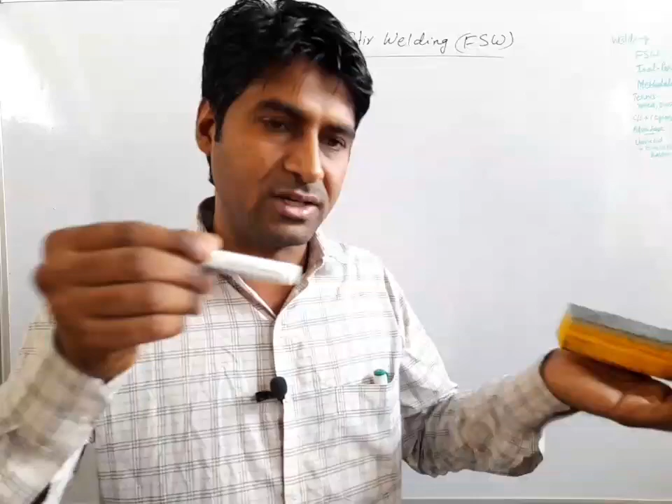So today I will discuss about this friction stir welding, but first of all I will tell you about the background of this welding technique. So when we listen about this welding, some pictures come in our mind, like the roadside welding where one electrode is used and a flame is generating and melting is occurring and some pollution is there, like this.

But friction stir welding is a different kind of welding. This is not a fusion kind of welding. This is a solid state joining technique. Solid state meaning there is no melting occurs and no pollution is there, no fume is there. So this is a kind of green technology, we can say.

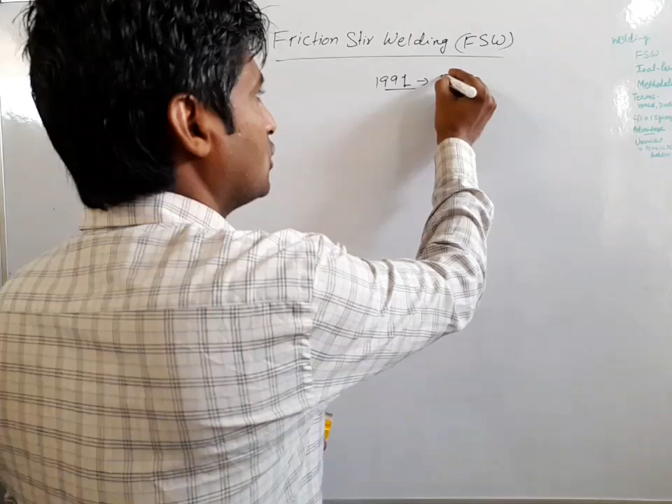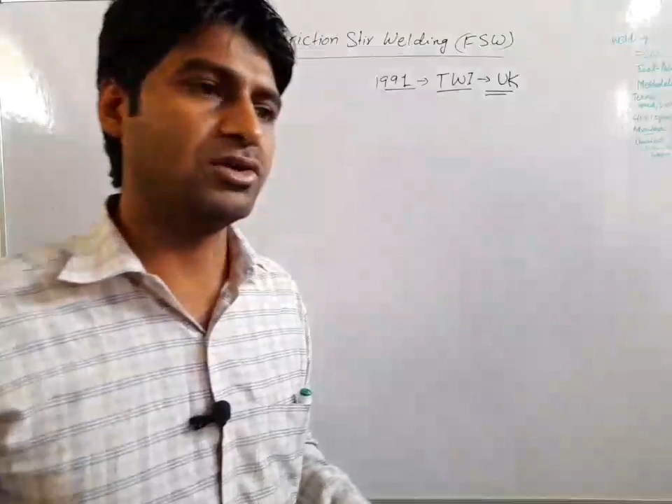And this is not a much old technique. This was invented in 1991, that is about 30 years before, and this was invented at the Welding Institute, TWI, in UK. So this became very popular, especially for aluminum alloys or low melting point alloys like magnesium alloy.

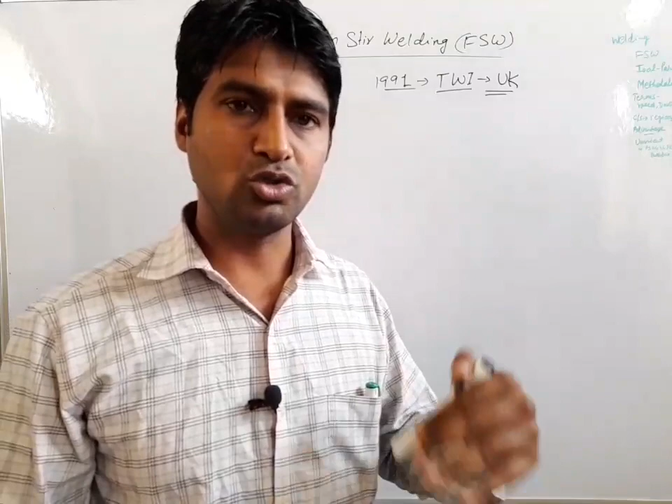And if there is no melting, then how is it possible to join the material? So this is due to the plastic deformation and frictional heating.

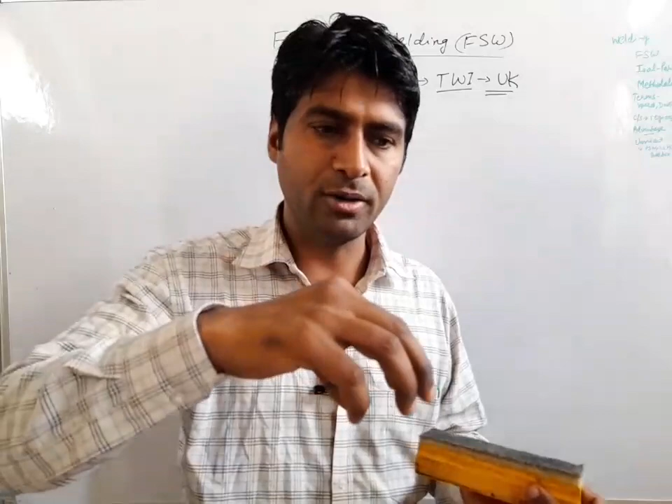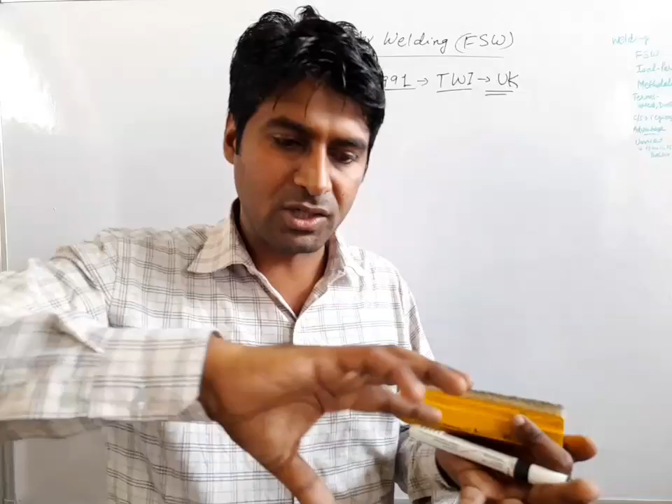What is plastic deformation? As we know, we use a stirring machine in milk to produce butter. So that kind of stirring is occurring here also, because the pin of the tool is inserted into the base material or the interface of the two plates where we want to join the material, and it will stir. So the back side material will go front side and front side material will go back side. Material is stirring around the pin, and due to this kind of plastic deformation, this welding takes place.

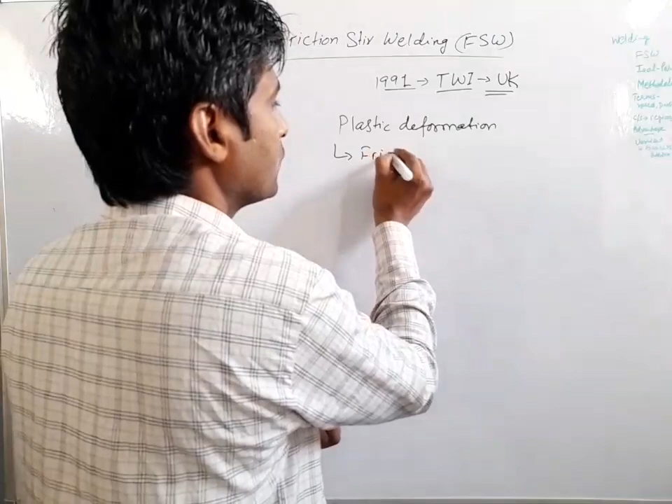So I have used the word plastic deformation along with the frictional heating, that is the heating produced due to the friction between the shoulder of the tool and the base material surface.

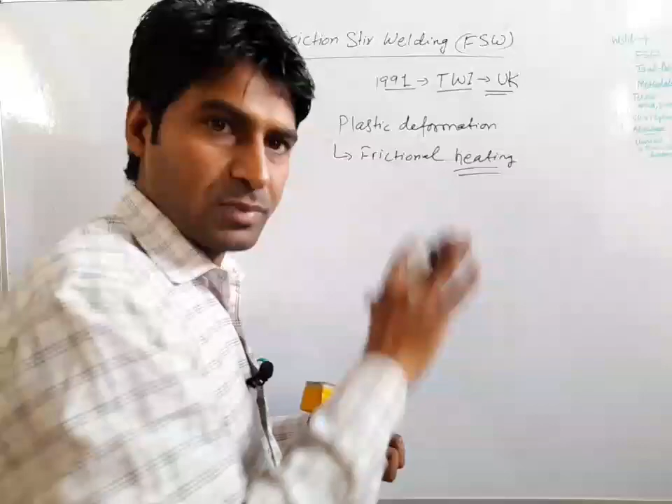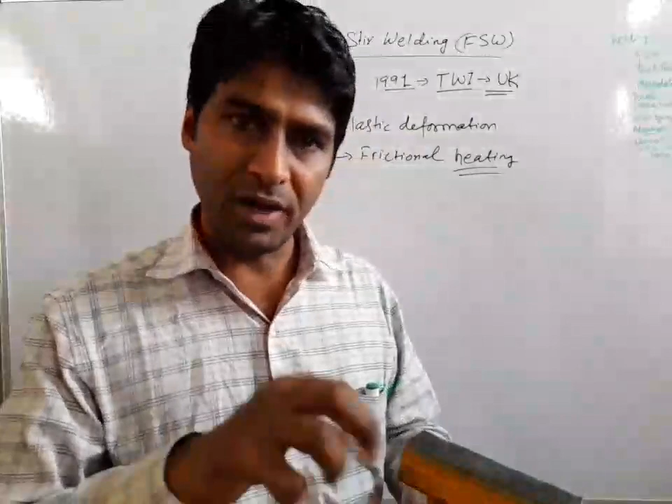Okay, so this is about the friction stir welding, and now I will show you. I have the actual friction stir welding tool and weld joint. I will demonstrate that, or I will show you.

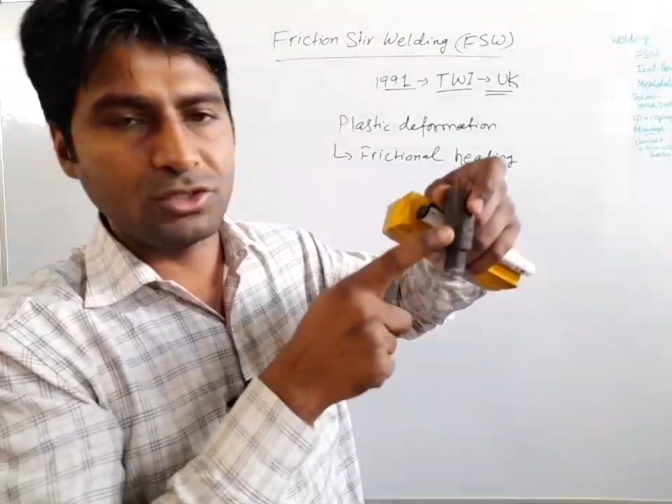This, first of all, is the friction stir welding tool. The upper part is called the tool shank. The second part is called the shoulder. And the third part is the pin or probe.

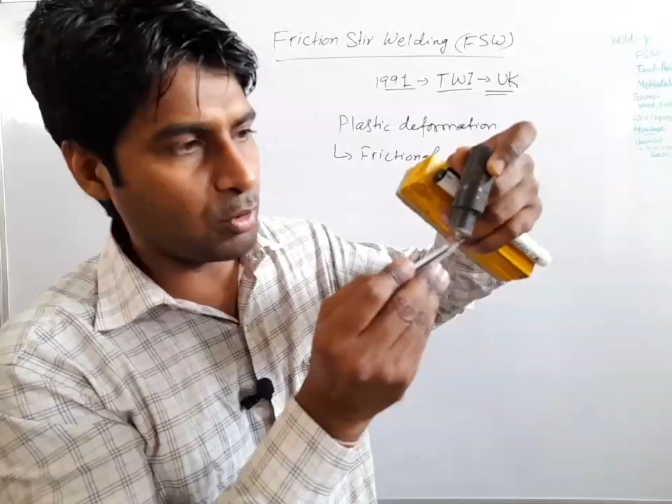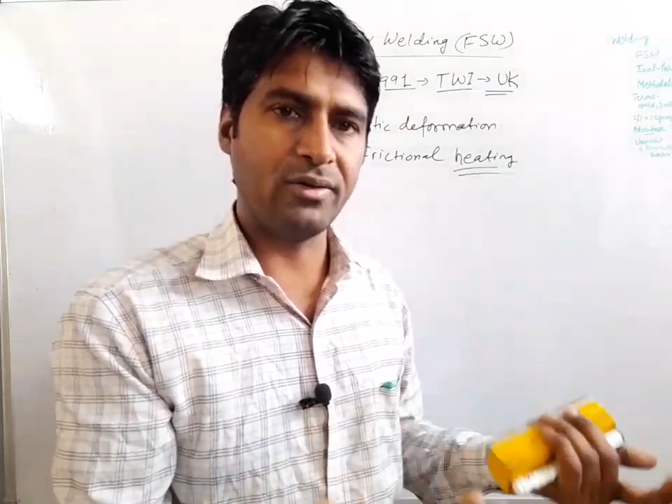So first of all, we will clamp this tool into the friction stir welding machine or a vertical milling machine, which we can use for this welding. We will clamp this shank part into that machine and rotate at high speed, like 300 rpm, 500, 1000, or 1500. And then, like methodology, how this welding takes place.

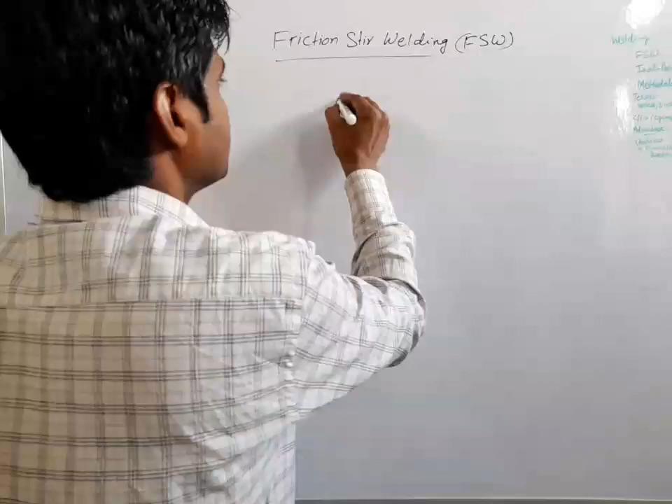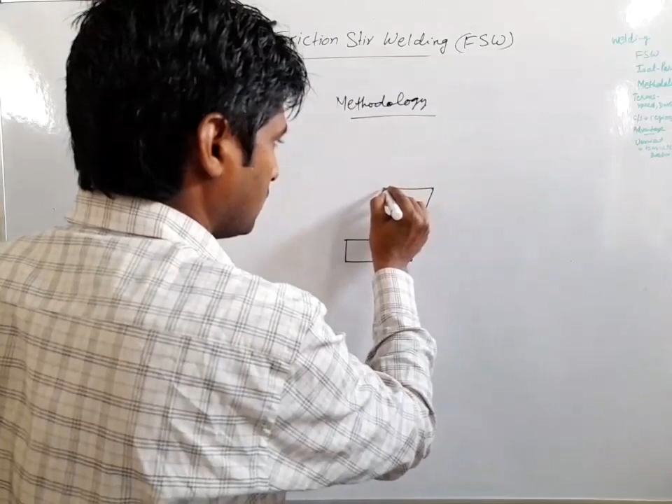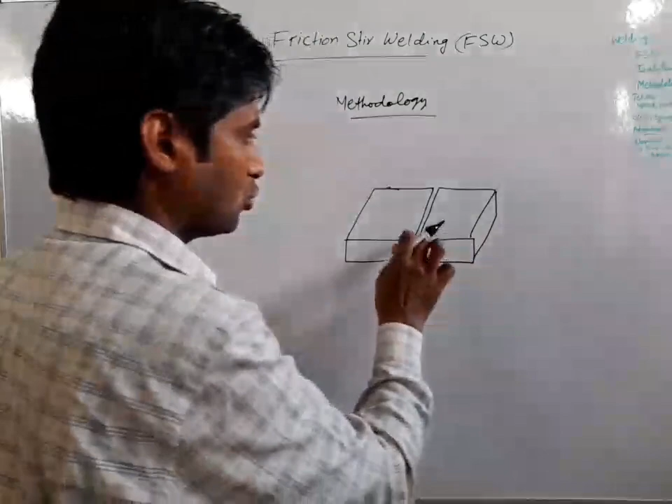Methodology: suppose we have this, one plate, and we want to join this plate with another plate, and we will clamp them. I am just showing this gap, but there should not be any gap between these two plates. These plates will be firmly clamped with each other.

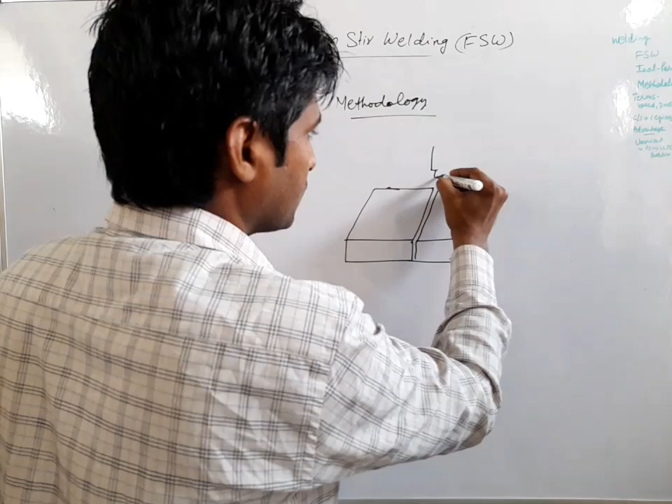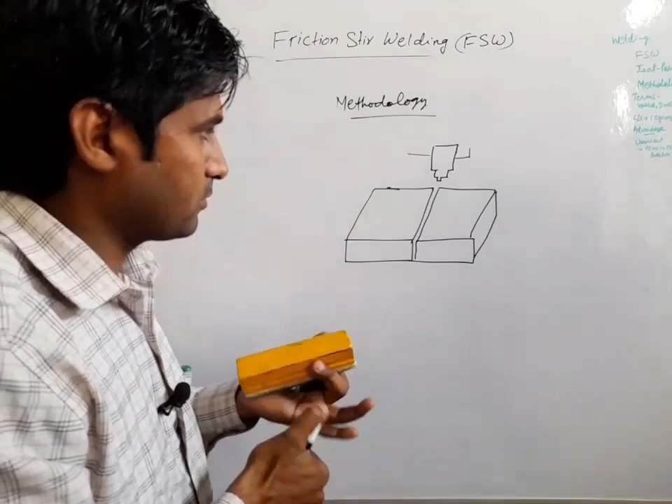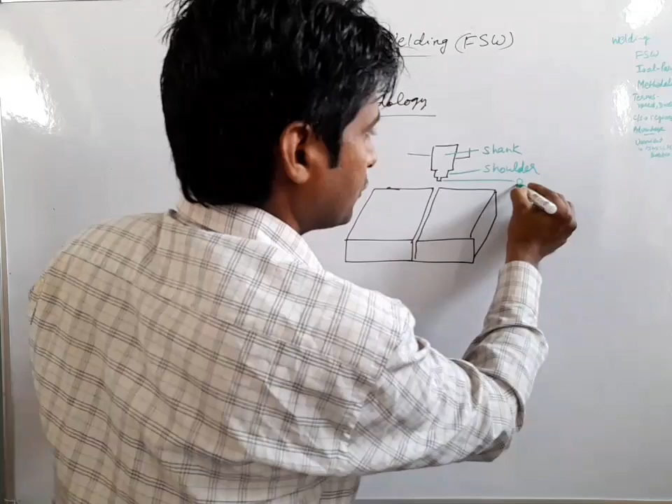Okay, and a tool is used here like this. This is the FSW tool. This is clamped in a machine, this is the tool. This tool is in rotating position. And what are the different parts of this tool? This is shank, this is shoulder, and this is pin, tool pin. So these are three major parts of this tool, and this tool is in rotating position.

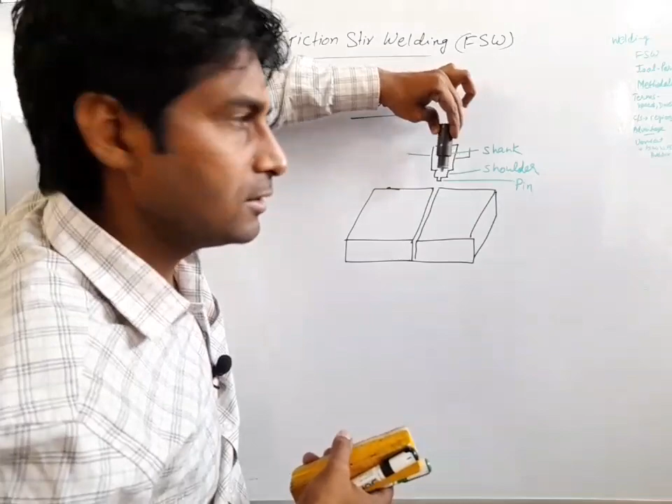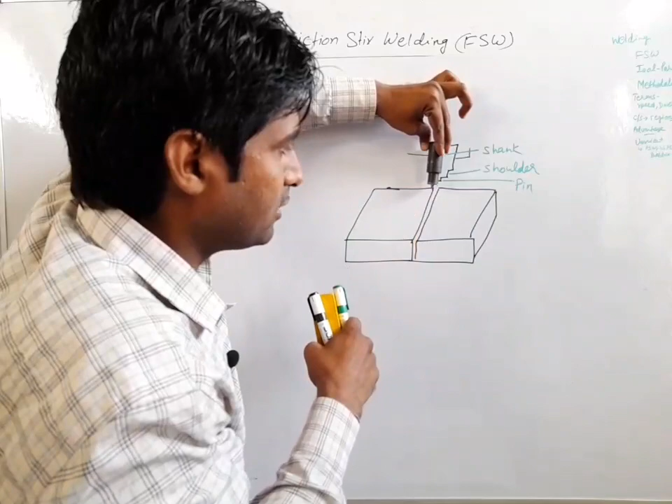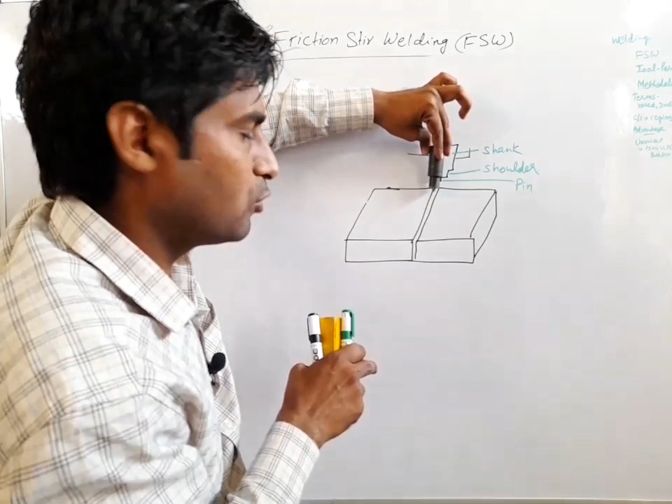This is rotating, and in rotating position we will bring this tool close to the surface of the plates. First this pin will touch the surface of the plate, and then in rotating position we will insert this tool until the shoulder touches the surface of the plate, and then we will wait in rotating position for some 1 minute or 30 seconds. That is called dwell time.

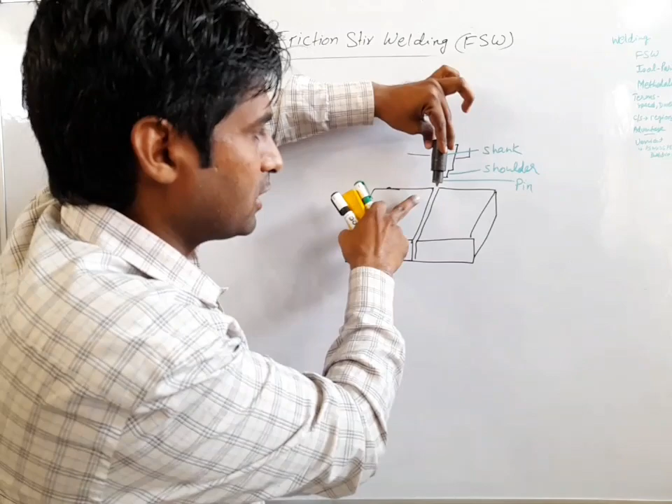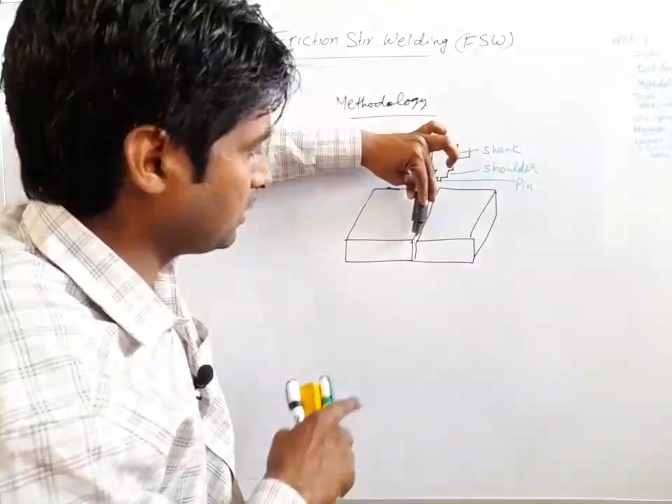During dwell time, due to this friction between the shoulder and surface, there will be frictional heating, and the material in front of this tool will get heated so that it becomes soft. Then we will start to traverse in the direction of welding, at what is called traverse speed or welding speed, and at the end we will stop the movement but in rotating position only, and we will exit this tool from the base material.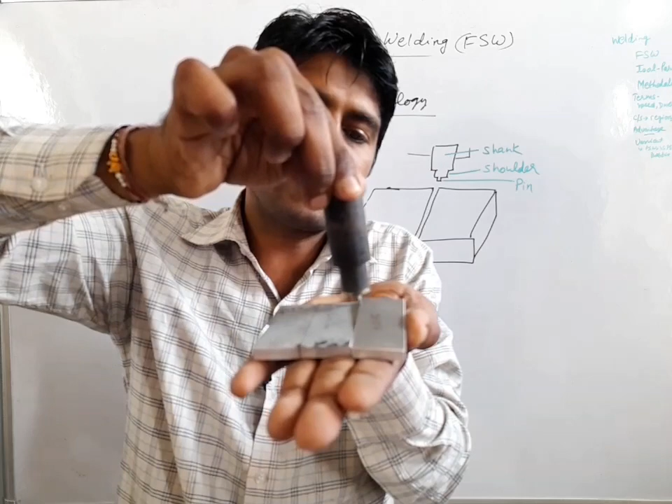Okay, and then the weld will be produced here. So how this weld will appear, I will show you. First of all, these are two plates which we want to weld. We will clamp these plates, and after firmly clamping, this tool will be inserted at the interface of these, and then in rotating position we will traverse this tool and exit here at the end. So welding will take place.

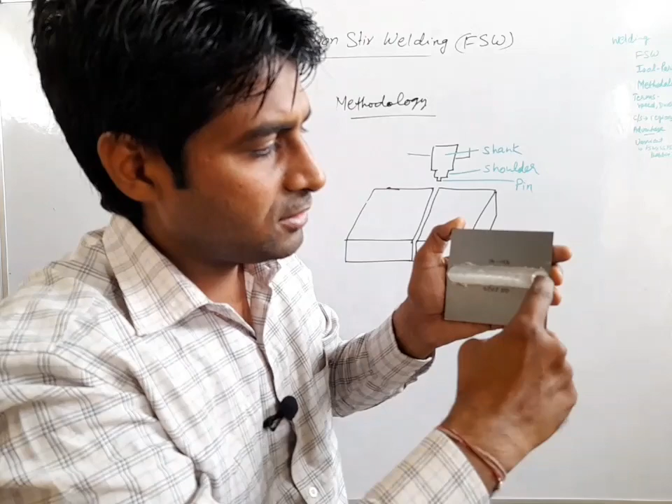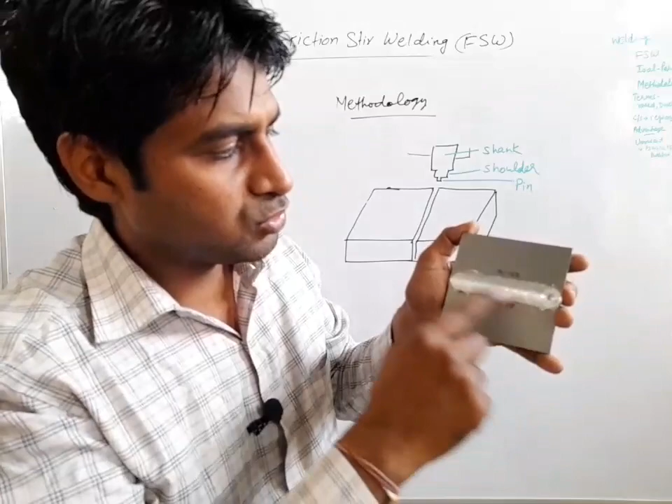So how does the weld look like? The weld looks like this. This is the starting point where we inserted the tool and traversed in this direction, and here the tool exits. So this is an impression of the pin and shoulder where the tool exited from the plate. So this is the welded plates. These were two different plates. Here we can notice some line.

Okay, so now it is a very good or sound weld. We cannot break it with hand. This is a weld of aluminum alloys.

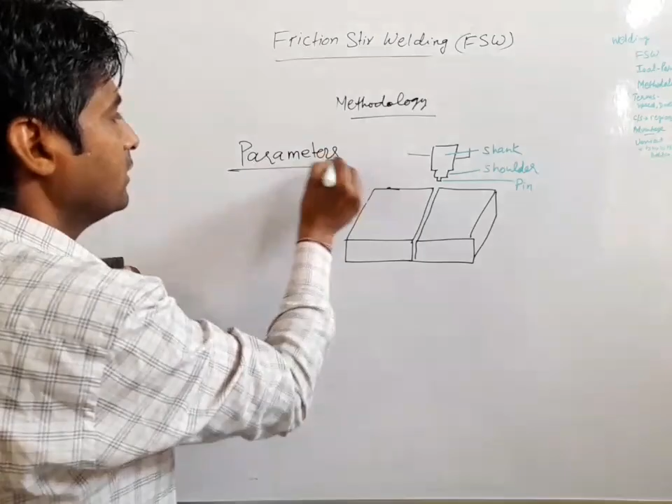Next is the various terms generally used in friction stir welding. These are parameters used for friction stir welding, like speed parameters, rotational speeds, and traverse or welding speed, that is the linear movement of the tool.

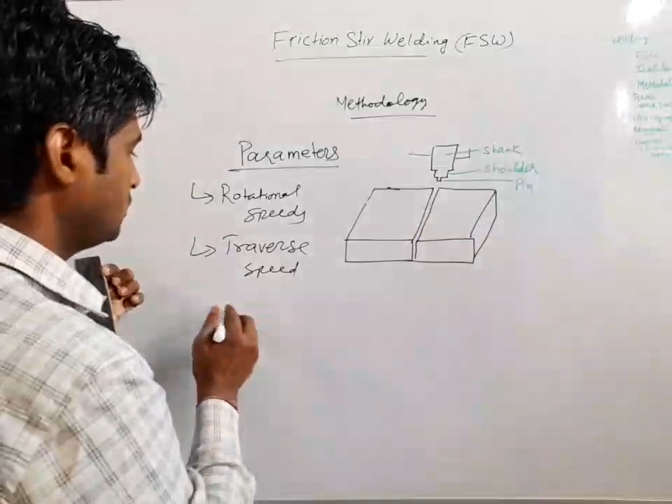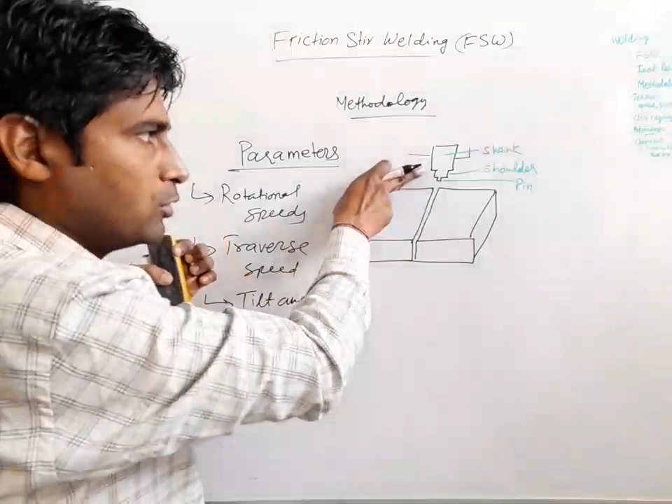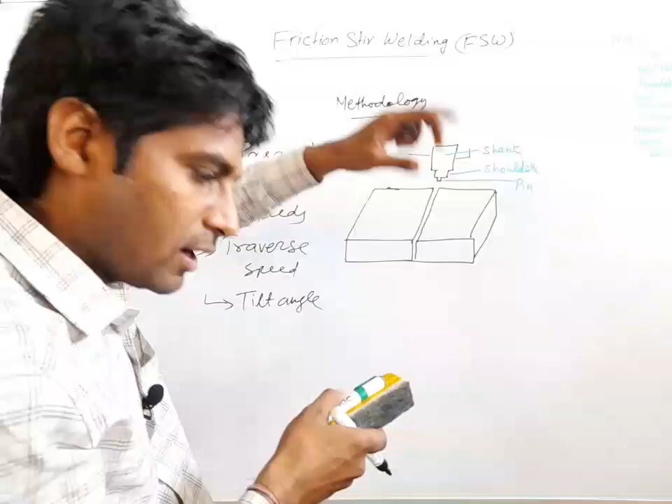Then there is tilt angle. Tilt angle is the angle given to this tool for effective forging action, so that the material behind the pin or under the shoulder will not go out or spread out from this region under the shoulder. So we provide some tilt angle to the head of the machine.

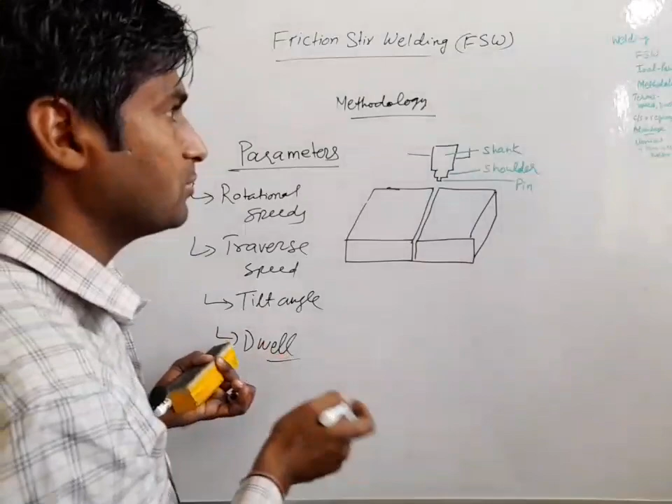Then dwell time, as I discussed earlier, is the time given before the movement of the tool. So these are the mainly used parameters in friction stir welding.

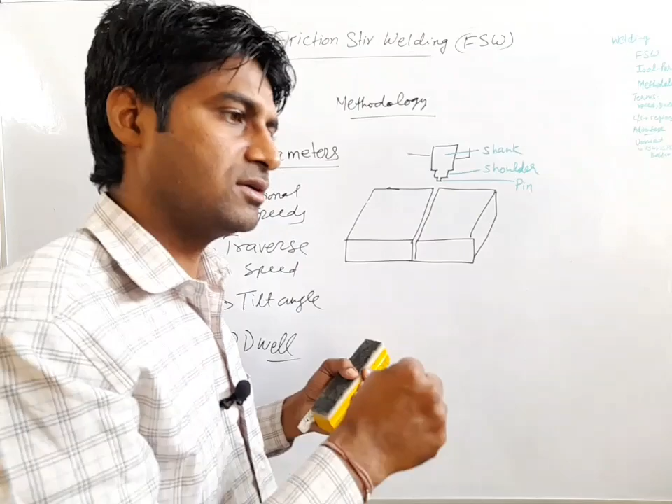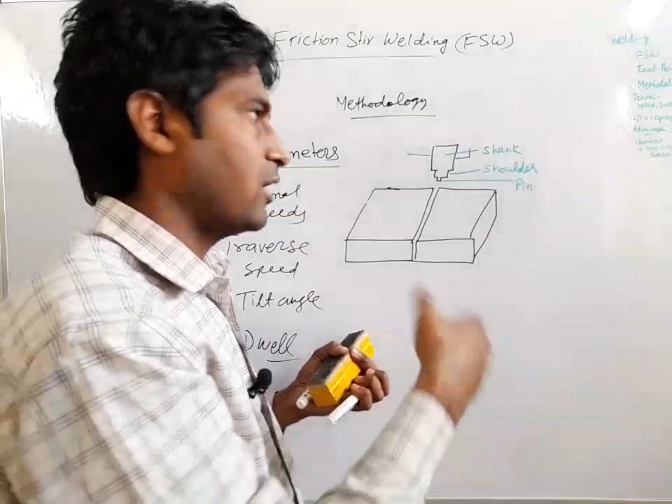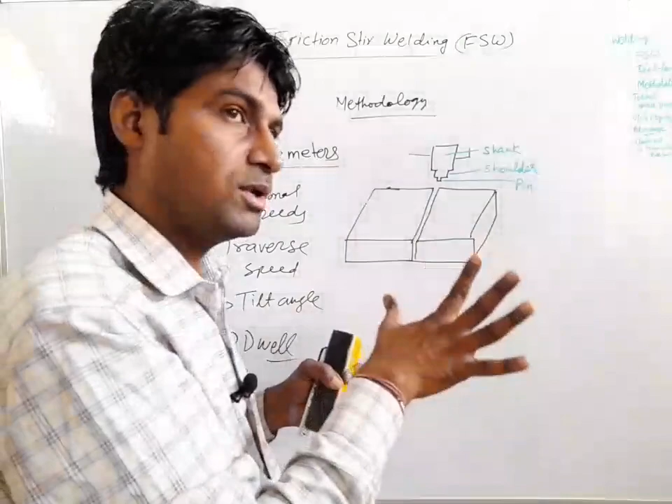And what is the material of the tool? Tool material should have very high wear resistance and be able to sustain high temperature during welding, because temperature in the nugget zone generally goes about 500 to 600 degrees. In case of aluminum alloy, it depends on the base metal material, but it will be less than the melting point of that base material.

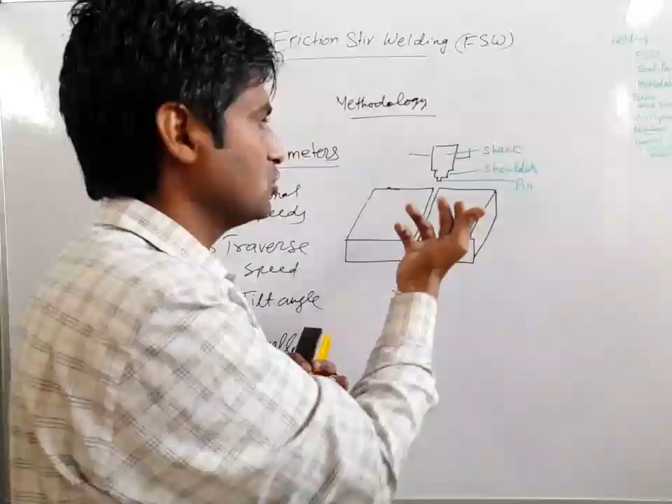So generally for aluminum alloy welding we use a die steel kind of tool, or for steel or mild steel welding we use a tungsten carbide tool like this. There may be some very hard or costly tool material like PCBN.

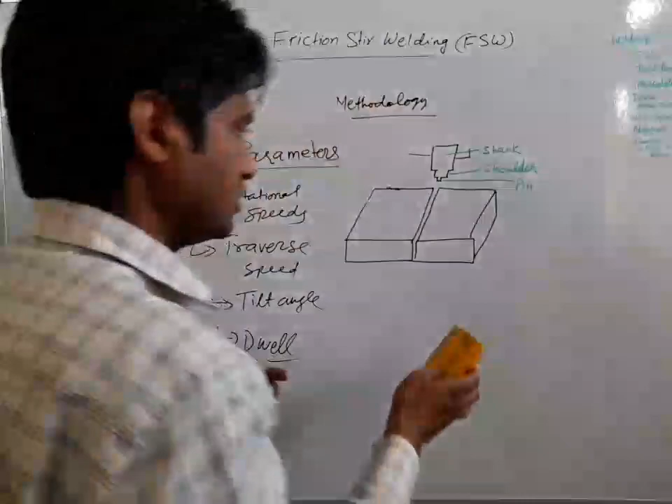Now I will discuss the various regions. What type of regions means, when we cut the sample from the weld joint. Suppose this is metal 1, this is plate 2, joined from here. This is the region where the pin was stirring. This is called the nugget zone or stir zone.

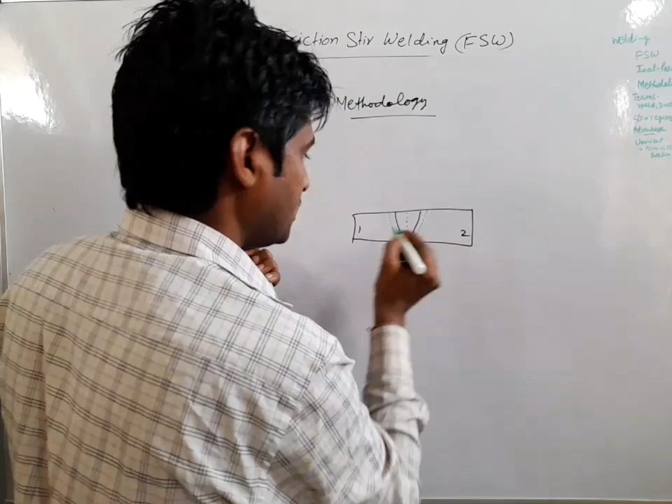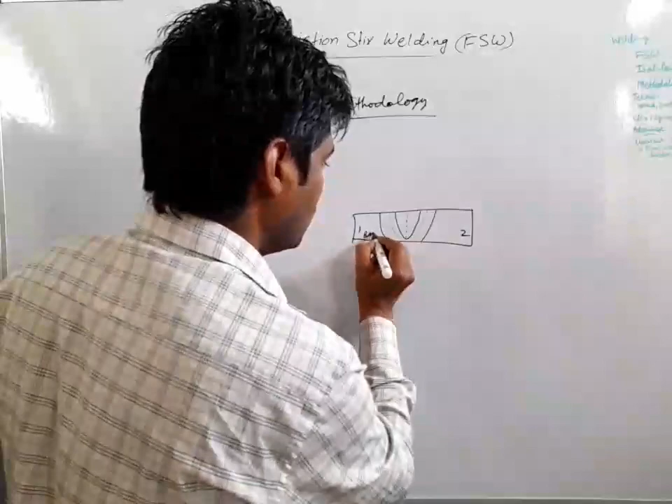Then there is a second, thin region. This is called TMAZ or thermomechanical affected zone, and next is the heat affected zone, HAZ, and next is the base metal, where no change in microstructure takes place and no change in properties occurs.

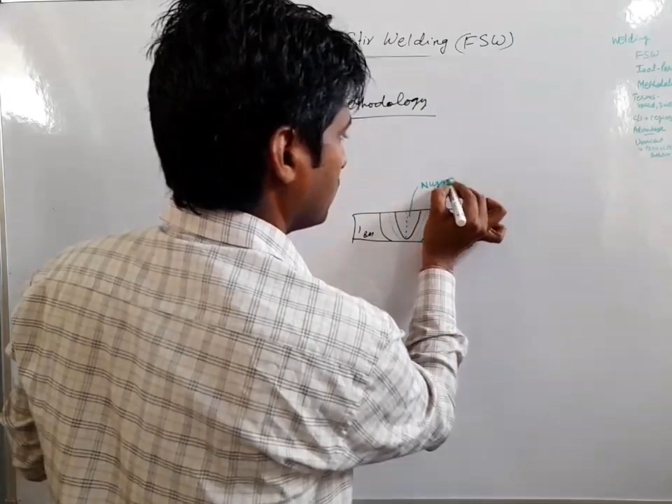So first is the nugget zone at the center, or stir zone. Second is the thin region, that is TMAZ, full form thermomechanical affected zone. Then next is the heat affected zone.

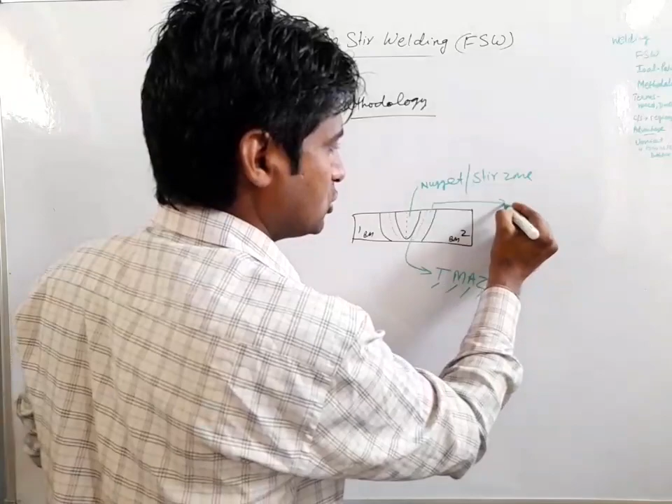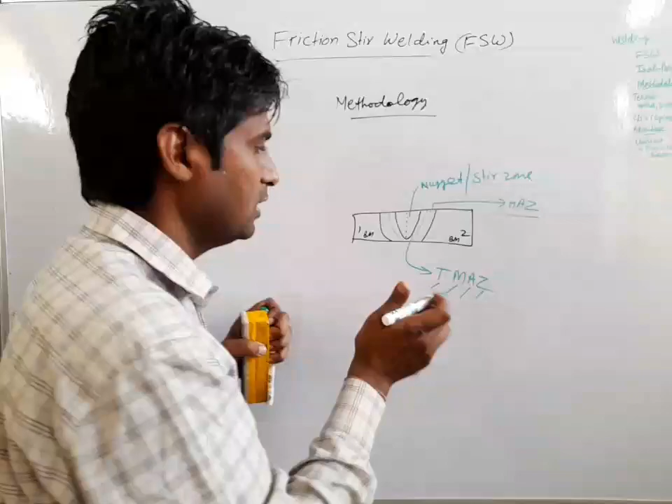The heat affected zone experiences only the heating or thermal cycle of the weld, and microstructure change may take place due to the thermal cycle only. But TMAZ experiences thermal cycle as well as plastic deformation. So in TMAZ generally elongated grains can be observed, but in the nugget zone there is recrystallized grain due to plastic deformation, then heat affected zone and base metal.

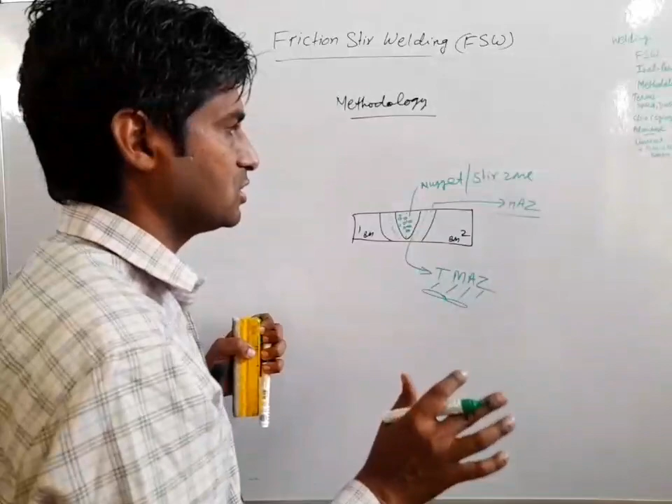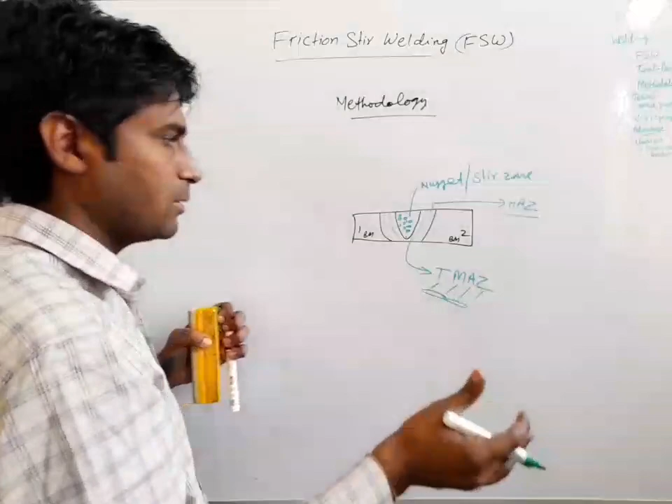Most of the time in aluminum alloys, the heat affected zone is the severely affected region where the properties of the material are degraded in terms of mechanical strength or corrosion resistance. So most researchers work to reduce this heat affected zone in the weld joint. This is a kind of heterogeneity in the weld joint.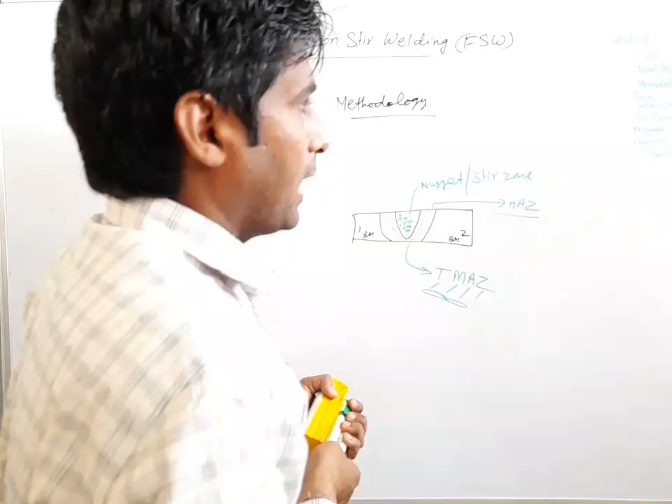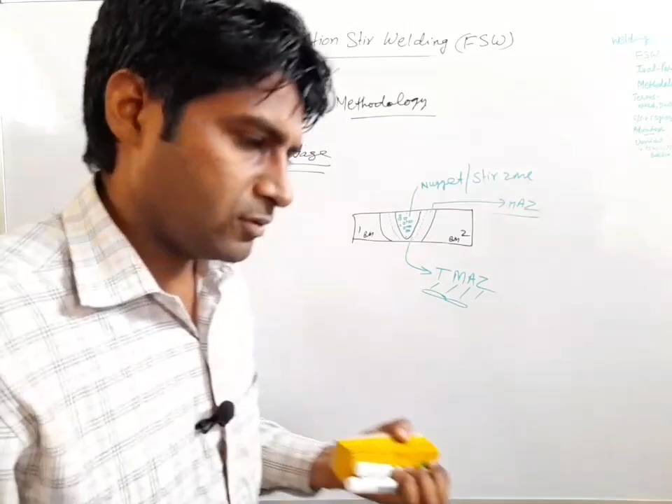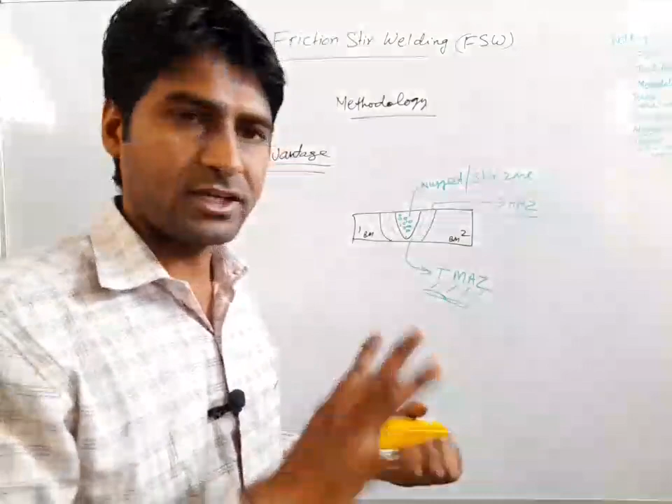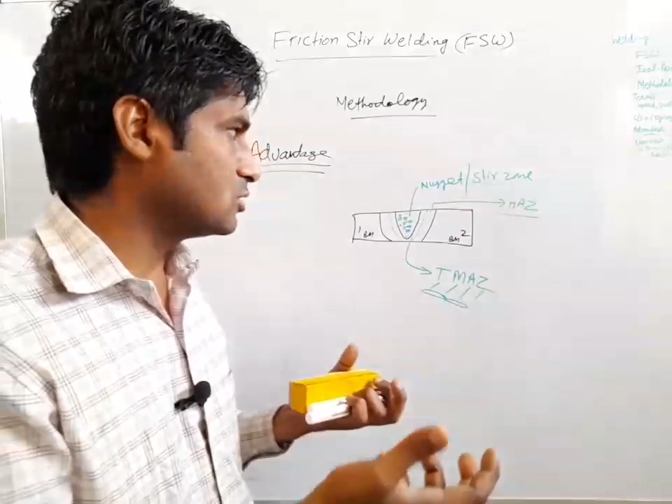Next, what are the advantages? You may think why we use this kind of welding when fusion welding or conventional welding is available. But some material like aluminum alloys are very reactive to the environment, and due to melting during fusion welding or conventional welding, these may get defects like solidification cracking or porosity. These are not possible in friction stir welding, because there is no melting, and this is a solid state joining technique. So this is the advantage over fusion welding.

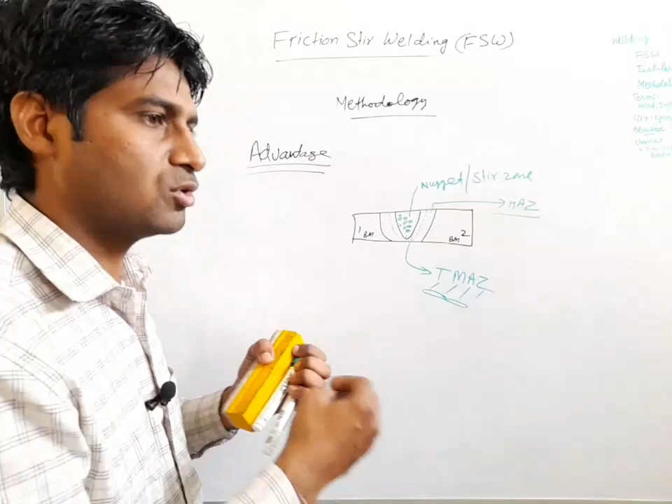One more thing is low melting point material can be welded easily, because the material does not get melted during this welding, so the various elements don't get vaporized during welding. This is very useful for aluminum and magnesium alloy. Magnesium alloy also has a very low melting point, not so high.

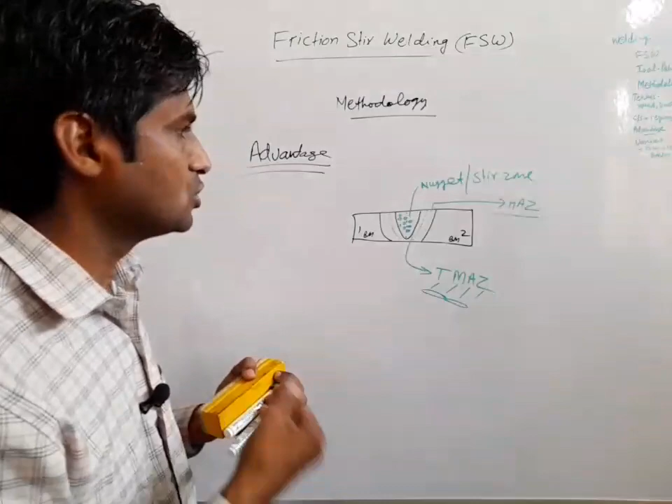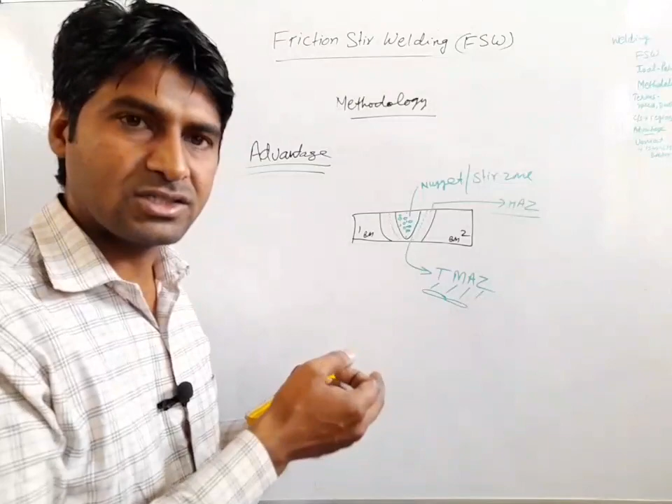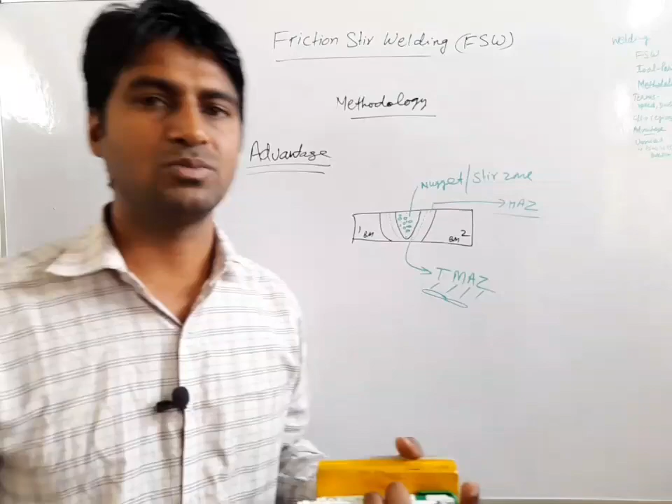So these are the advantages. There may be some kind of defect of its own, like tunnel defect, root defect, or any kind of surface defect. But if we optimize parameters like welding speed or traverse speed, then we can produce a very sound or defect free weld joint.

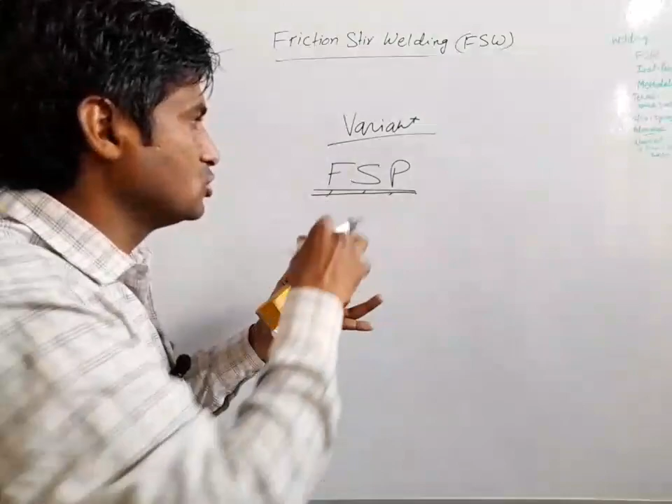There are also some variants of friction stir welding, like friction stir processing, FSP. This is not a welding technique, but the processing parameters are similar to friction stir welding. This is used only for surface modification. On a single plate we use this FSW tool, and it will modify the upper surface of the plate. So this is used for surface modification.

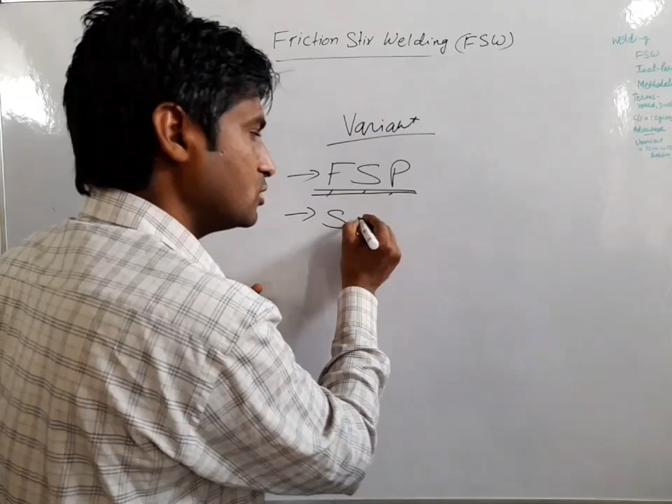There may be non-rotating or stationary shoulder FSW, stationary shoulder friction stir welding. There can also be a bobbin tool kind of friction stir welding. So there are many variants of friction stir welding.